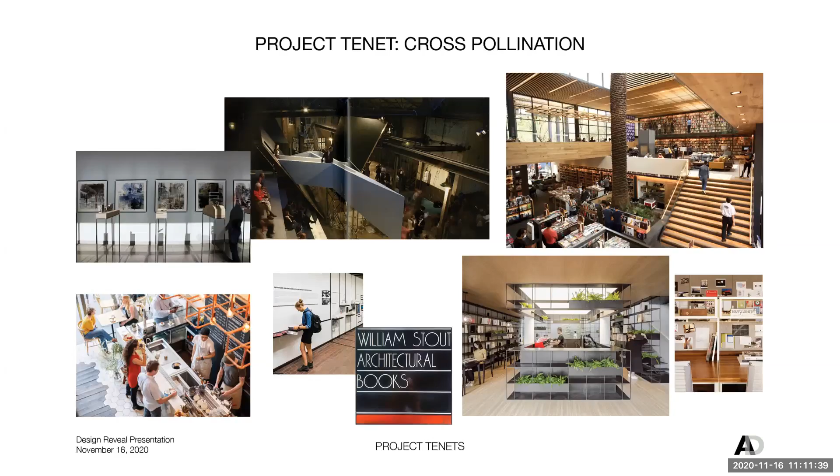Key to this success, and taking advantage of the ground floor space, is creating a venue which is very porous - one where you can be in a cafe but simultaneously observing people in a much more dynamic kind of gallery setting. And in that, this idea of layering visual, audio, and physical spaces, we feel is critical to creating this dynamic hub.

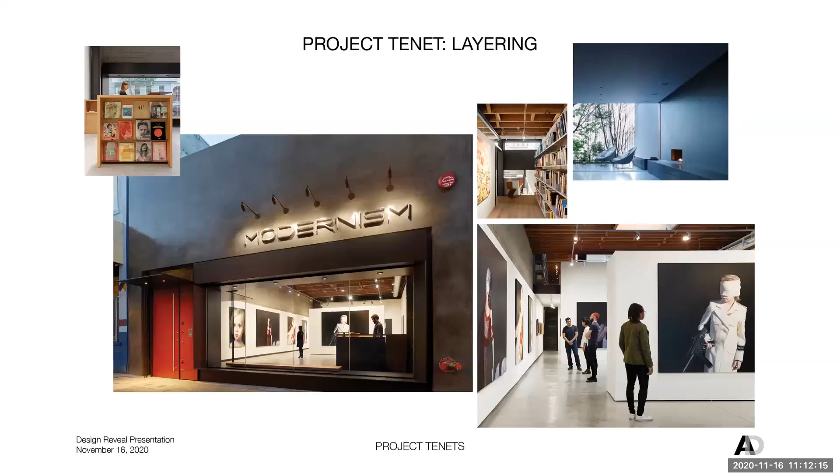And then given that there's so many different programs that we're envisioning occurring in this space, creating a space that's highly flexible is also critical. And also given that the existing ground plane is variable in height, taking advantage of that and sculpting it intentionally, both inside and out.

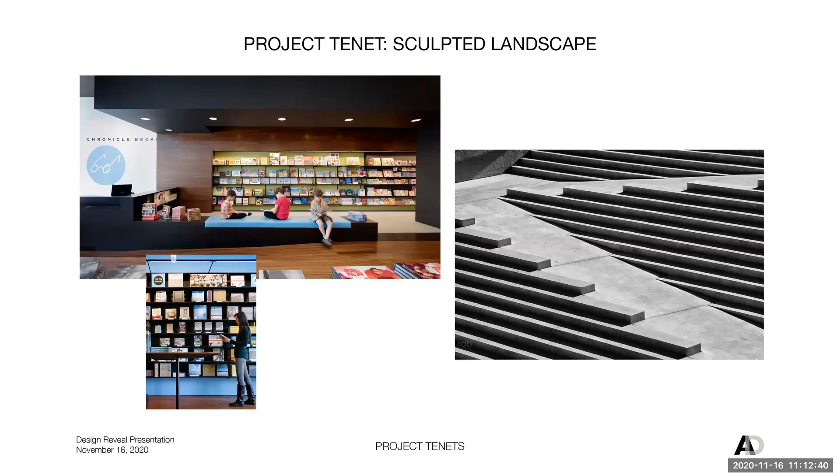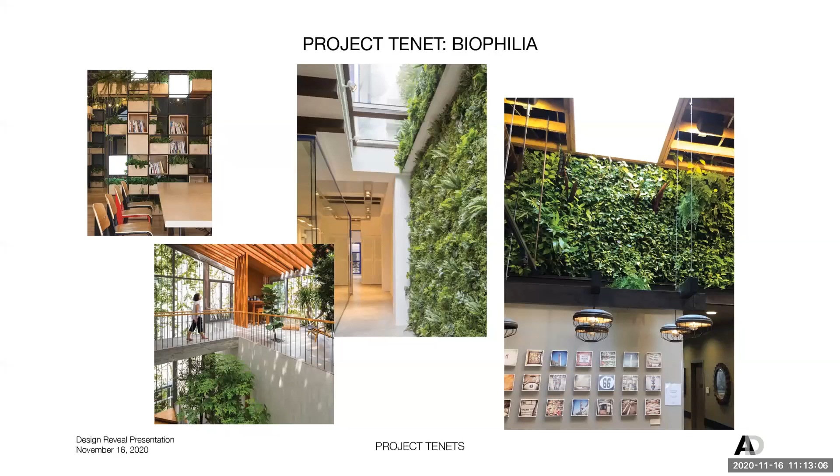And then obviously the opportunity to focus on a biophilic, sustainable space we feel will not only provide a great venue for visitors, but equally importantly for the staff, creating a truly scientifically born and proven environment that will be sustainable throughout.

So if you take a step back through the history of San Francisco, historically we've been the heart of progressive narrative, whether it starts with Allen Ginsberg, through the Beat poets, and obviously their home being City Lights Bookstore. How can we create an equal, if not more powerful, venue here in the new center?

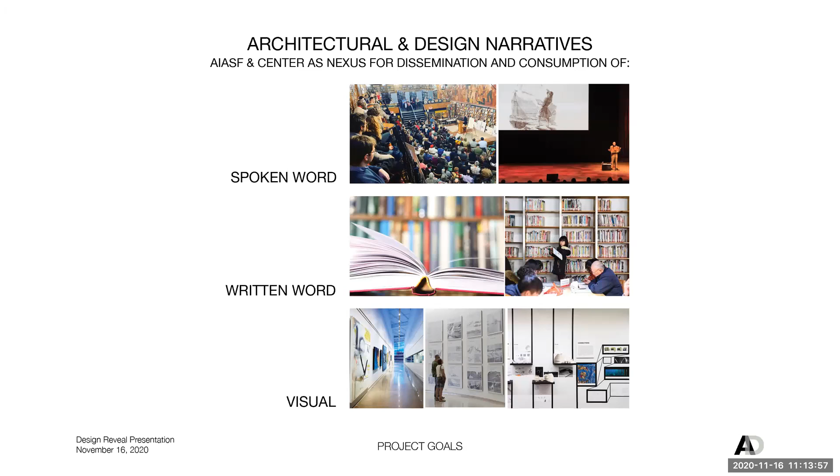One where we create this nexus for dissemination and consumption of the architectural and design narratives, whether it's through spoken word, through lectures and panel discussions, or written word in the bookstore, or purely the visual, creating this architectural and design gallery for the public and the architectural community to consume. And all of this is focused on creating and educating the public and enlivening a rigorous architectural design discourse, and ultimately just educating all.

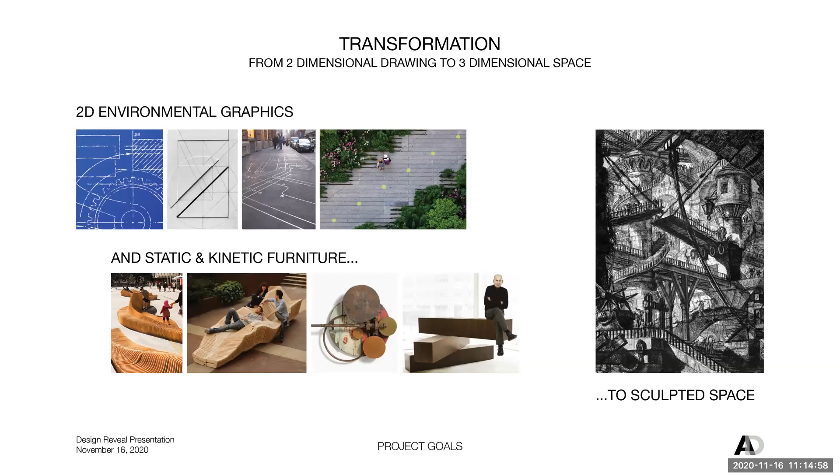So if you look back through the tools that architects use to convey their ideas, the blueprint is obviously at the heart, where you as a designer are communicating to the makers of the world. That starts in two-dimension, becomes three-dimensional, and ultimately, how can that concept be discovered here in this home for the new center? So starting at the streetscape level, creating not only static, but potentially kinetic furniture, which would then become potential parklets, ultimately to be sculpted as this discovery within.

So starting with this site analysis, you have this incredible front facade, fully glazed, bringing in natural south-facing light. It's an amazing nave-like, almost religious space in its proportions. It's a double high space in the front with a mezzanine in the rear, in the northeast corner. It also has a lowered roof with no building occupying above it.

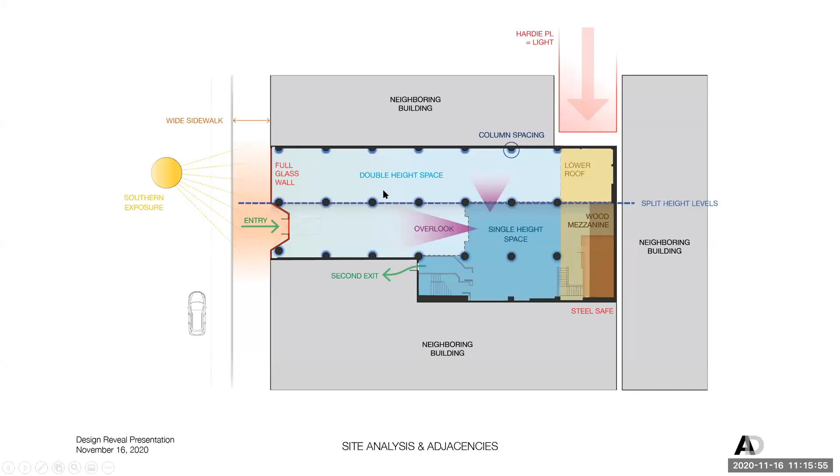So we have the ability to bring in natural light in the rear of the space, and to take advantage of this existing steel safe in the rear of the building, acknowledging the fact that there's a level shift from east to west and how we can use that as an opportunity.

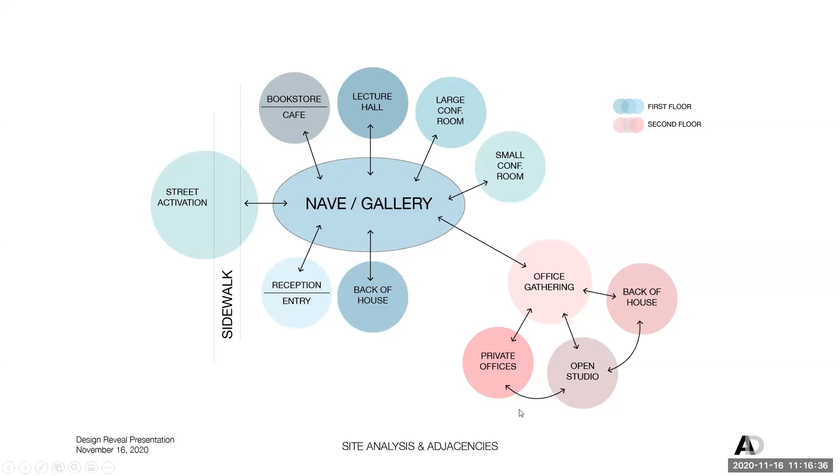So the diagram evolved where you have this double high nave gallery space, which is kind of the heart of the institution, bringing people in off the street both visually and physically into this nave space, which is then surrounded by bookstore, cafe, lecture hall, conferencing spaces, reception area, and the necessary restrooms and cooking facilities, which are back of house spaces. Nesting up above, you have the private offices of the AIA in the center.

So when you lay that out on the ground floor and upper mezzanine, you have this active street facade opening up to an entry and reception, a dynamic community bookstore cafe that then evolves into this nave gallery space down the center of the space.

An adjacent lecture hall, and then two adjoining conference rooms, one large and one small. Nested here, in the darkest corner of the space, would be the back of house restrooms and cooking facilities. Up above, nesting on the mezzanine, are the private offices with access to the lecture hall as well.

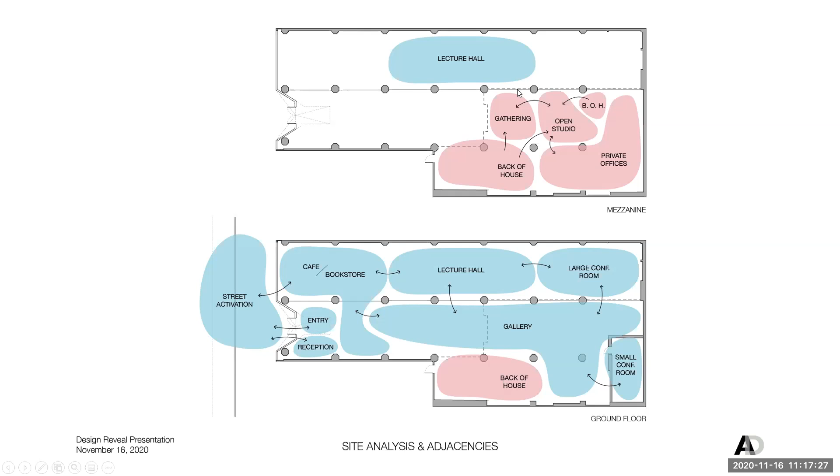So this schematic design, as it's evolved over the last couple of months, and I should say that this has not been a solo effort by any means. It's been a large team of consultants and a critical partner in BCCI construction, all with all hands on deck, trying to extract the most potent, but also the most cost-effective solutions possible.

So again, starting with this kinetic furniture out front as street front furniture that can then swing out and begin to create a more public facade and face to the institution. You enter through the double doors to a reception area, but before that, these red rectangles are indicators of architectural display, which then merge with an architectural bookstore and cafe.

So what you see in blue are full height bookcases that then give way to the nave, which is all architectural and gallery display. There's an upper gallery and a lower gallery, and then additional art display being able to be pivoted out with this kinetic gallery space.

Directly adjoining is a 120-seat lecture hall with retractable seating at this point, obviously depending on fundraising, whether that becomes fixed seating or not is to be determined. In the rear, you have a gracious 35 to 38 person conferencing space, 2 stories tall, graced with a living wall and natural light penetrating the ceiling plane.

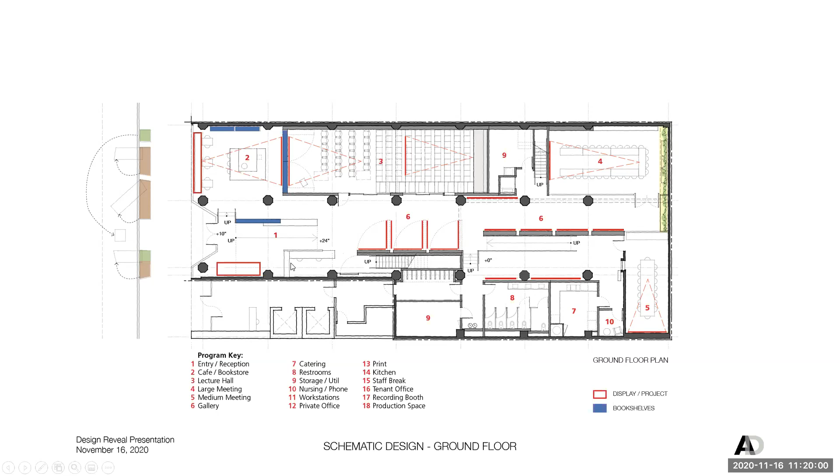And then when you rise up to that mezzanine level, you arrive at 2 different points, one the main stair, one the side stair, all with a reception area and all the research tools at everyone's disposal. You also have private offices with an open studio in the rear, breakout rooms, small kitchen, recording booth, and a series of private offices to accompany. You also have a lift which can bring you up to the raised mezzanine level for the lecture hall.

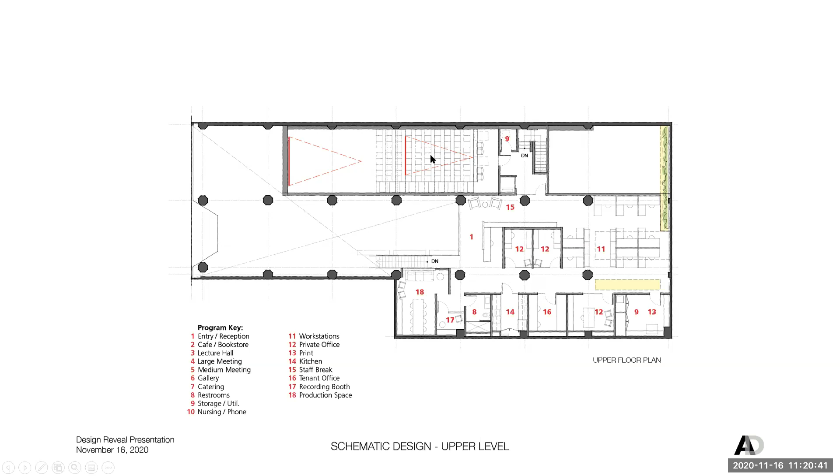So in section, this is a cross section, north-south section through the entry cafe bookstore, again a vaulted space, which has the ability to have projections ongoing throughout the day and evening, through the lecture hall, again with its retractable seating and dual projections within. And then you have the large 1.5-story tall meeting room with the skylight and living wall at the rear.

Moving a bit east, the cross section through the nave itself. Again, an incredible 19 to 22 foot tall space with ample sunlight coming in from the south, and then breaking up into the lower gallery and upper mezzanine for workstations and work office.

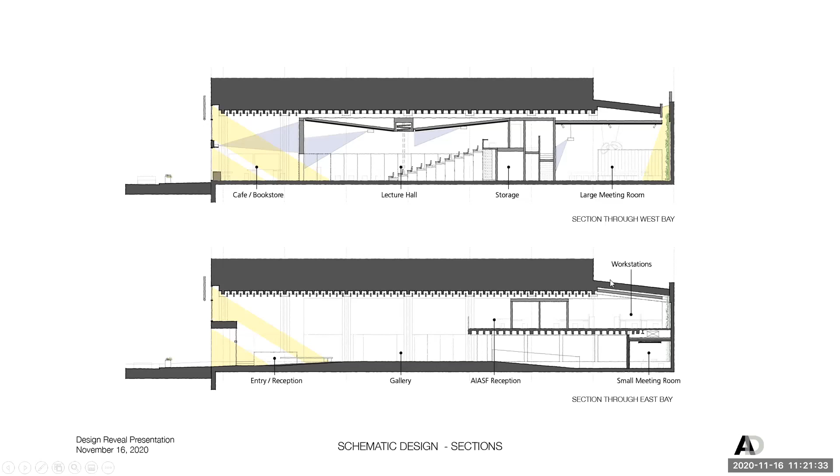This is a cross section looking east. In this case, you have the entry to your right, then reception, and then this long nave gallery space for architectural display, with offices up above, and this living wall and natural light coming in on the left.

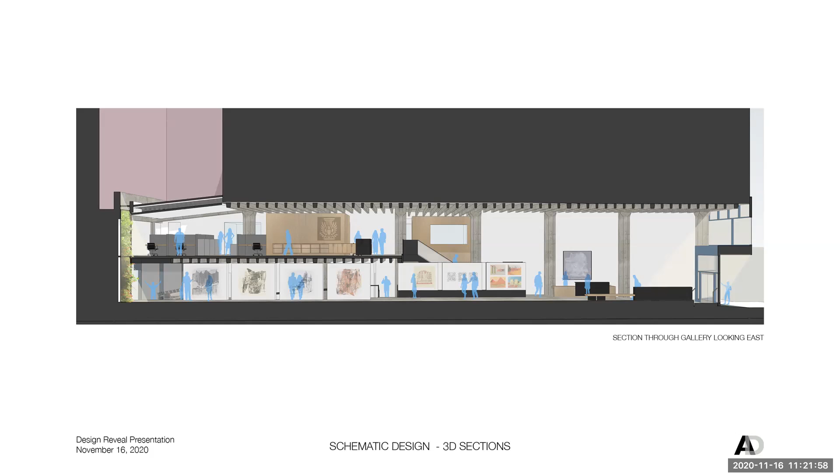A cross section looking the opposite direction, again walking through the nave, up the stairs to the offices above, and beyond you see the lower gallery in this case, and then the smaller conference room, retrieving indirect light from the skylights beyond.

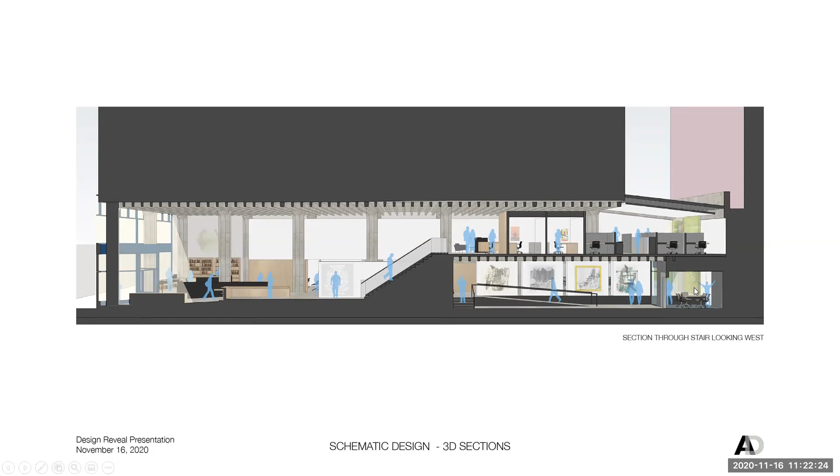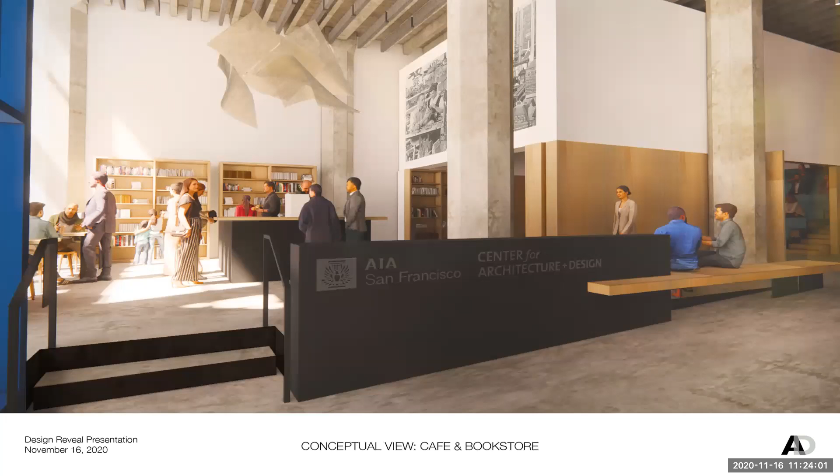And then swinging around, looking back to the west, you see this 2-story tall cafe and bookstore. Again, natural light coming in from the storefront, people gathering, really creating a communal space for all of San Francisco and internationally, actually, the ability to come in and absorb architecture, have a dialogue about architecture and design. Up above, you can see the ability to project movies and or stills to again inspire the dialogue happening below.

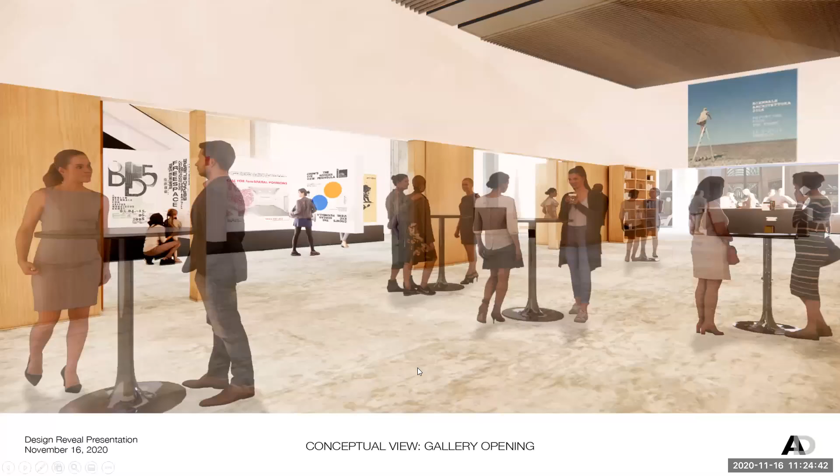When seats are retracted, this is a view from the lecture hall looking out towards the cafe and over to the east towards the gallery exhibit area. Again, the space will be rented out throughout the year, so creating dynamic, flexible space for those events would be critical. And then in pure lecture mode, the rake seating helps with viewing.

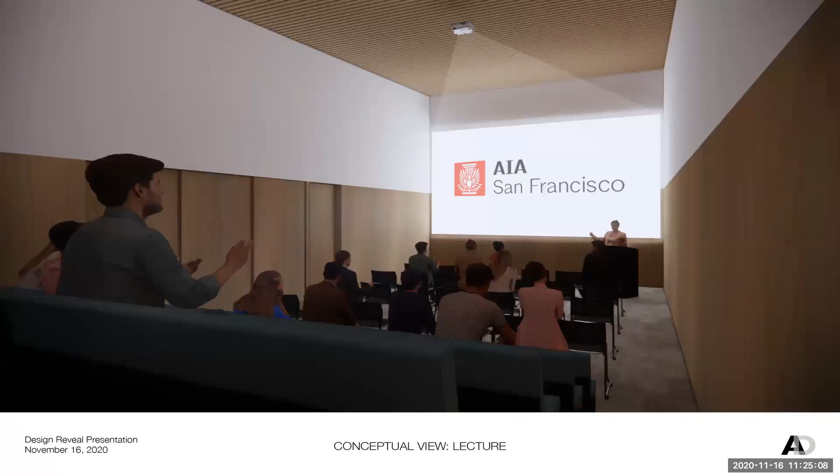It's really about respecting that existing structure and opening up to a large conference room beyond. So when you're in the conference room, you're looking back, you have the living wall to your left. You have this glazed lower facade, which is truly revealing the existing structure, almost like a Gordon Matta-Clark sculptural installation, which also reveals the architectural gallery and the lower, smaller conference room beyond through translucent glass.

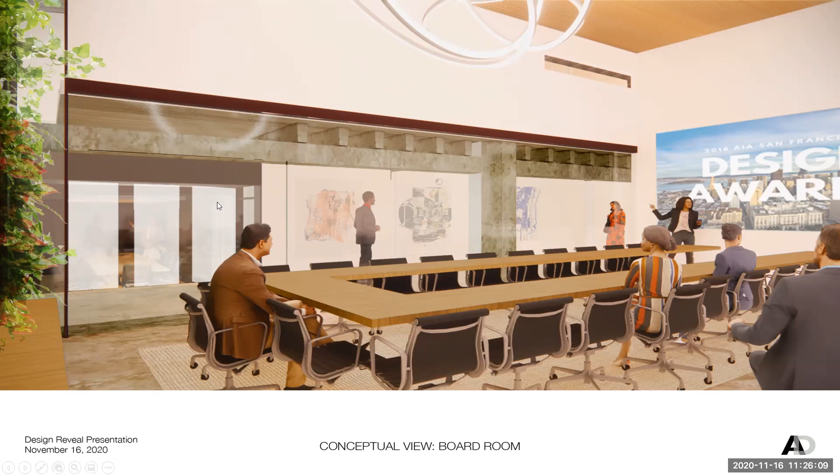Very dynamic space. And then once you're within the vault, or that smaller conference room, you're getting this beautiful dappled light coming through, diffused through the translucent glass, using sound attenuating surfaces, whether it's felt or ribbed ceilings, again, to create a very intimate space for the smaller conference room and meetings.

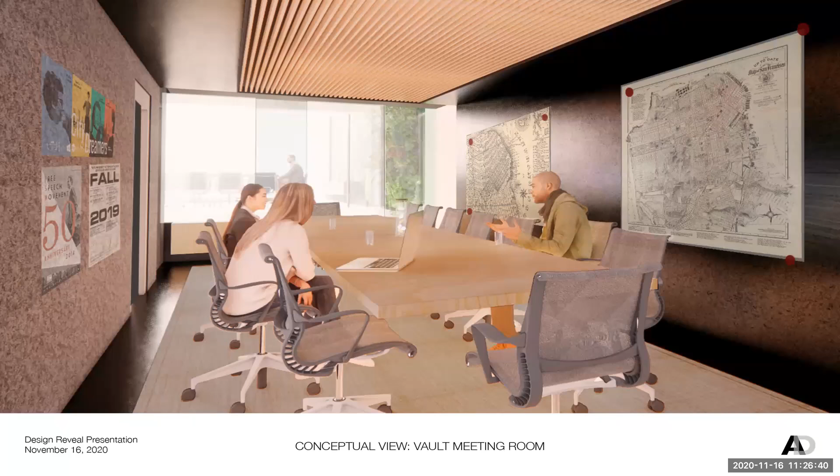And then last but not least, the facade in the evening of this dynamic institution, again, collaging architectural display, a cafe environment, a bookstore, a lecture hall, film, all together. So we're quite excited about the potential of where the entire team has brought the project.

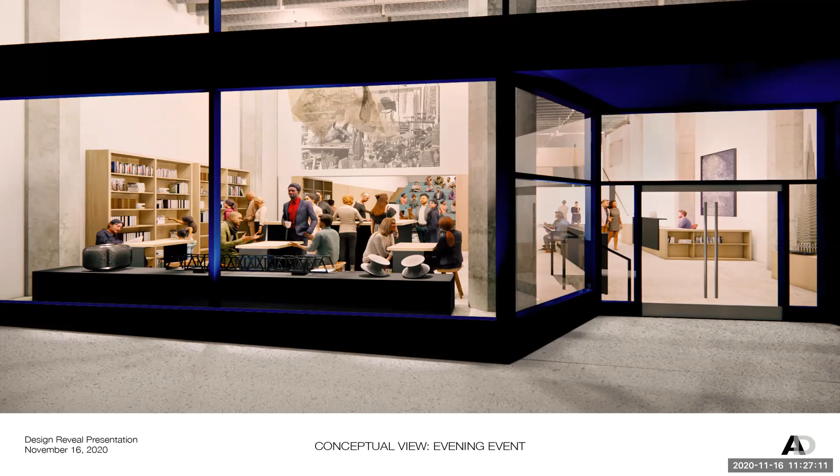And on that note, I think I'll hand it off to David to talk about the fun stuff, the financing of the project. Thanks, Josh.

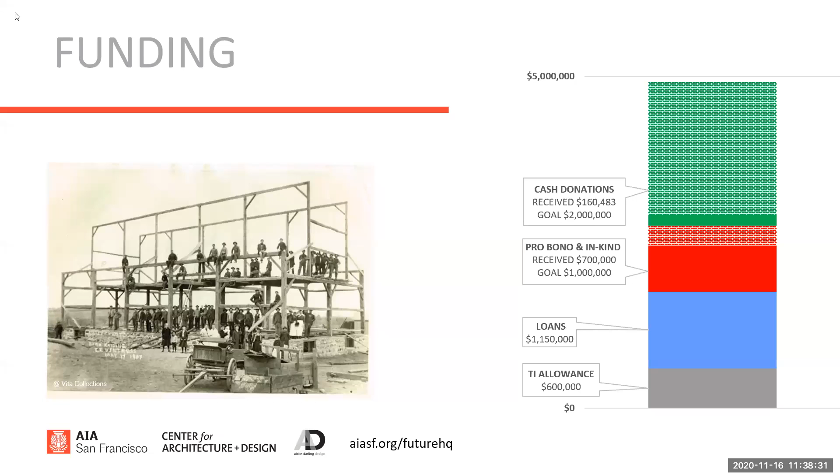Thank you, David. This has been a truly inspiring process, and thank you all. I can't wait to see the transformation that happens of the space and of the organizations involved in this. So I think we're excited to see what's next.

Over the last couple of months, we have asked a handful of people involved in the project to give testimonials as to why they're excited about the new AIA Center headquarters. As David mentioned, this is a barn raising—I think Chris Serenis came up with that term, and it stuck. So we've been referring to this project as quite the barn raising effort. We're inspired to see, and we'll continue to record these videos, but we're inspired to see what excites you guys about what we're doing. So we will show Cam, our center board president, and see what she has to say.

I am thrilled that we finally have the physical ability for the center to be what it has always desired—a place that brings people together with diversity of thought and practice. In 2021, the center and AIASF will relocate to a new headquarters on the ground floor of the historic Hallidie Building in downtown San Francisco. This street-level presence will welcome the community to participate in the future thinking of cities and places that are economically vibrant, culturally diverse, and distinctively healthier and more resilient. So I hope you will join me in supporting AIASF's capital campaign to build the new Center for Architecture and Design in San Francisco.

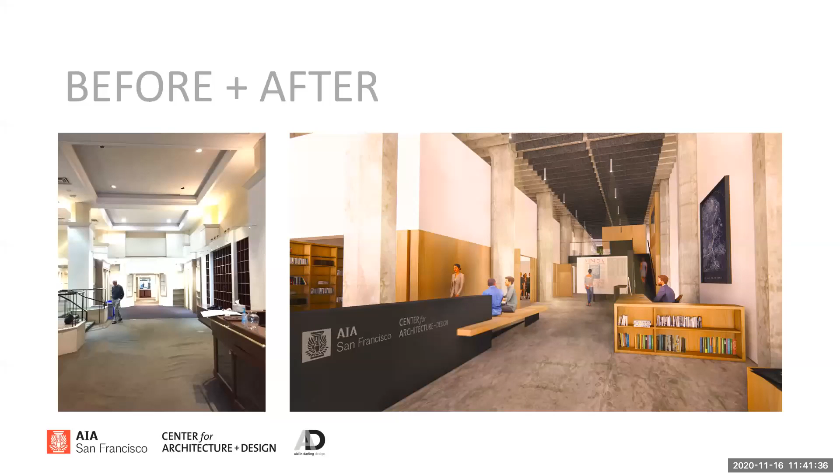Well, actually, this is a great example of what the space looks like now, and hopefully right after Thanksgiving it will be completely cleared out, in what is envisioned. So can you go to the next slide, please?